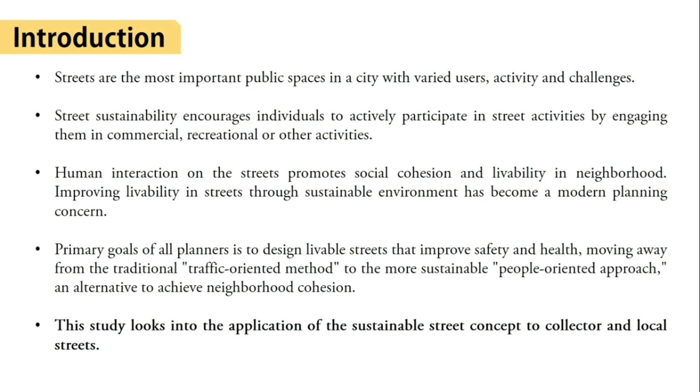This is more towards a sustainable, people-oriented approach. This study looks into the application of sustainable street concepts to collector and local streets. Purpose: the impacts of physical and non-physical variables on collector and local streets will be discussed in this review study.

The physical features in streets are objective, and their impact on sustainability is quantified by characteristics such as street width, sidewalk, tree canopy, and age of the buildings. Non-physical aspects are subjective and are judged by factors like imageability, legibility, safety, and transparency.

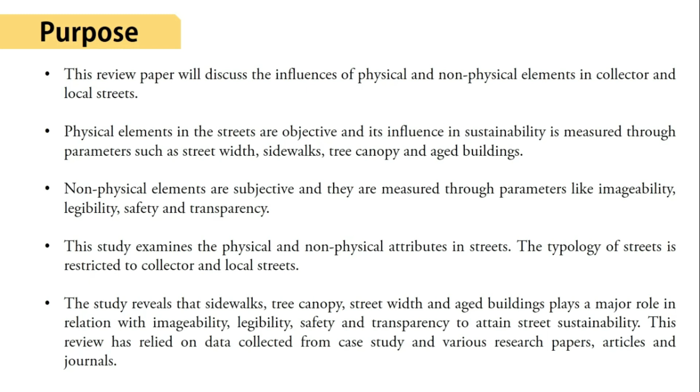This research looks at the physical and non-physical characteristics of the streets. This study reveals that physical attributes play a major role in relation with non-physical attributes to attain street sustainability. This review has relied on data collected from the case study and various research papers, articles, and journals.

Methodology: this study's methodology comprises a case study review supplemented by a literature review. First, a review of the case study was conducted by examining the physical and non-physical aspects of four mixed-use commercial and residential streets in Mylapore with varying traffic levels.

A survey was conducted on chosen streets to evaluate the physical and non-physical qualities. The comments were recorded and assessed for physical and non-physical properties by developing criteria for evaluating the physical conditions of mixed-use collector and local streets, as well as by reviewing prior research that assesses the street's urban design qualities.

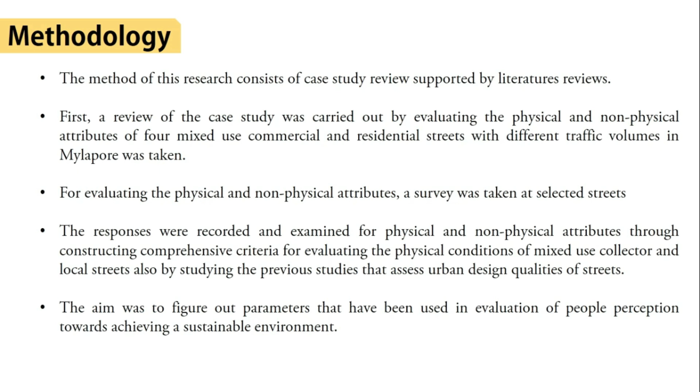The aim was to figure out parameters that have been used in evaluation of people's perception towards achieving a sustainable environment.

Study area: Mylapore is a heritage neighborhood in Chennai, Tamil Nadu, well known for its residential complexes, temples, retail malls, music halls, and auditoriums, as well as classic 19th century residential structures. It is one of Chennai's most densely populated areas and a favorite destination for academic interest in urban planning and development.

Despite a number of challenges such as excessive traffic and street congestion, it performs important religious and economic functions. Though it has issues such as high traffic and overcrowding in the streets, it serves as a religious and commercial center.

One of the most significant urban design difficulties has been the lack of separation between pedestrians and the public domain. In order to acquire a better understanding of the influence of physical and non-physical properties, this review study uses descriptive analysis to track the key characteristics of mixed-use streets.

A questionnaire was the primary data gathering strategy used in this study. The map shows the study area; four streets around the temple premises have been selected, and sample street perspective images are shown here for understanding.

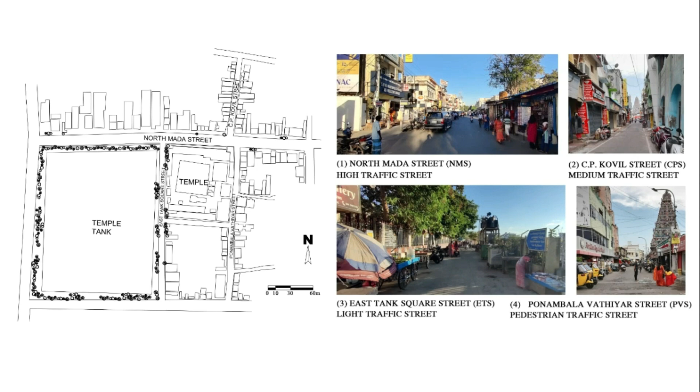Street selection criteria: a high density mixed-use collector street and three local streets bisecting this collector street, with medium, light, and pedestrian traffic flow, were chosen for the study.

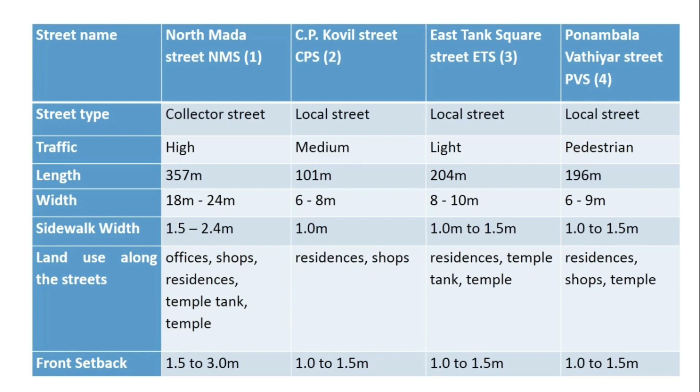The table shows the type of streets, traffic, length, width, and available width of sidewalks and land use along the streets. This study examines a variety of physical and non-physical aspects to investigate the

attributes and characteristics required for a successful livable street. As a result, in this table, the primary characteristics that address the concepts of livability in mixed-use streets are classified as physical parameters.

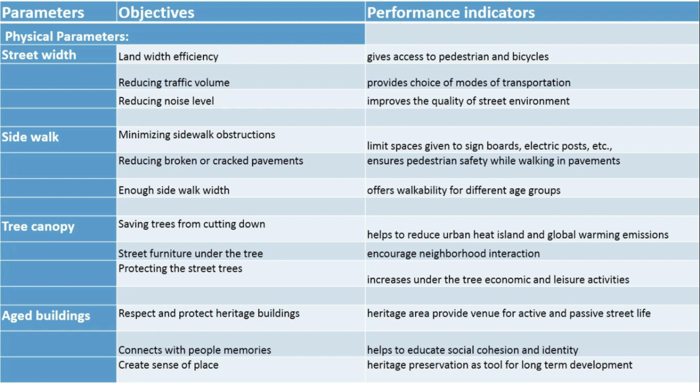Each parameter is listed with its objectives and performance indicators. Further, each parameter is framed with three sets of questions, and the observation and evaluation are done for both collector and local streets, and the results were analyzed.

Based on the questionnaire output, the results were tabulated in this table showing the assessment of streets for the physical attributes.

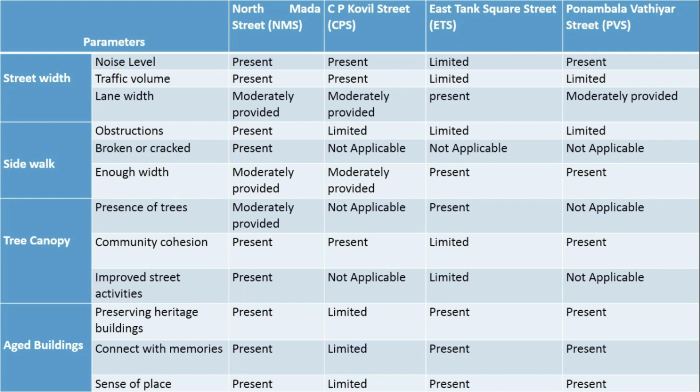Each selected parameter played a major role in street sustainability. Street width encourages walking, bicycling, and other modes of active transportation. Sidewalks are important components of pedestrian-friendly streets because they provide pedestrians with safety, accessibility, comfort, and efficient mobility.

Tree canopy: trees can reduce stress and promote outdoor activities. Trees integrated in a well-designed streetscape attract more people to go for walking and children to play around.

Aged buildings: active and passive street life are more common in heritage areas. It also educates social and cultural values, gives identity, and brings social cohesion for sustainable development.

The characteristics of urban design qualities are referred to as non-physical parameters in this study. The four major parameters considered are imageability, legibility, safety, and transparency.

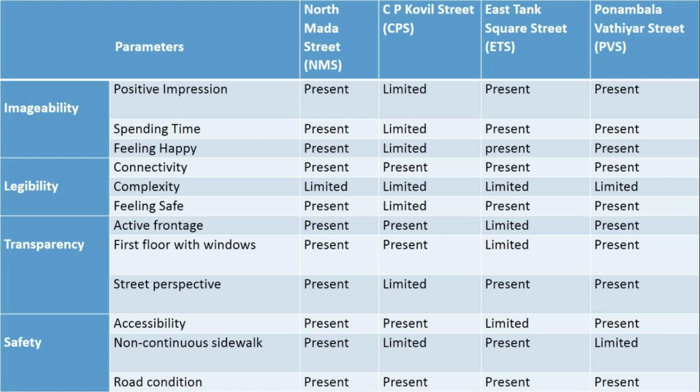Though these parameters are subjective and largely depend on individual perception, for the purpose of this study, through a set of questionnaires, all four selected streets were examined for these parameters, and the results were tabulated in a table showing the assessment of non-physical attributes and their influence on street sustainability.

Further, each selected non-physical parameter influences street sustainability. Imageability: the sense of community is perceived through public spaces, buildings, people's participation, social inclusion, and supporting community services. The shared experiences of people and the history of the place over the years emerge as the imageability of the place.

About legibility: effective connectivity between streets encourages walkability, wayfinding, and spatial connections in an urban neighborhood. Legibility promotes street activities and helps people understand the neighborhood more effectively.

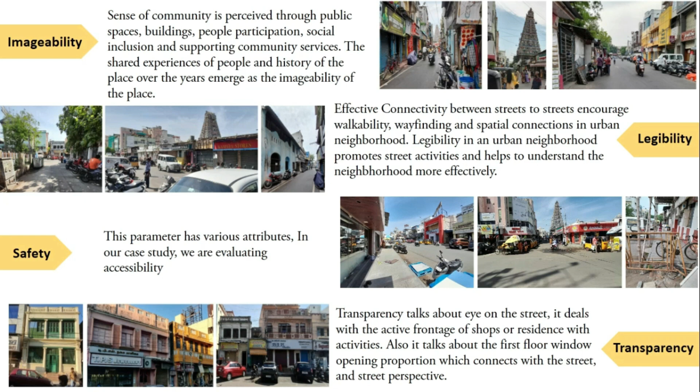Safety: this parameter has various attributes; in our case study, we are evaluating accessibility. About transparency: it talks about eyes on the street, dealing with the active frontage of shops or residences with activities, as well as the first-floor window opening proportion which connects with the streets and street perspectives.

Conclusion. According to the Congress for New Urbanism (CNU), streets should be organized, barrier-free, and accessible to everyone regardless of age, gender, or socioeconomic status.

Pedestrian-oriented development can only happen if there is enough street width for all modes of transportation, including a designated pedestrian lane that encourages people to walk and spend time on the streets. Lane separation also ensures street activity.

People can walk, sit, stand, and relax with their friends and families on a sidewalk with enough width, street furniture, and proper lighting for safety.

Street trees help reduce the urban heat island effect, and also provide economic and leisure opportunities under the tree as neighborhood activities. There are a lot of activities happening under the tree.

The policy has to be reframed to protect street trees and enable nature-friendly development plans.

Aged buildings always connect with memories. Reframing the development policy and development rights helps conserve heritage buildings.

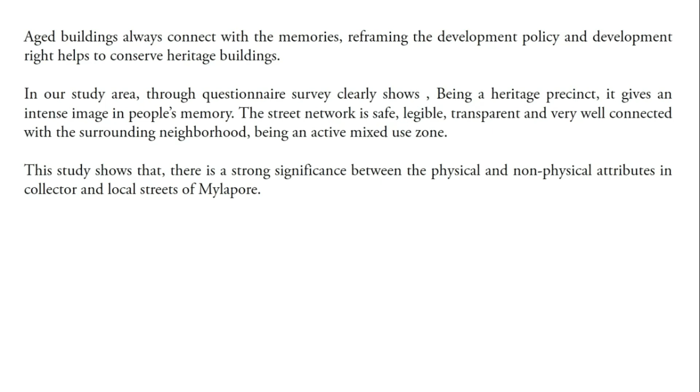In our study area, through the questionnaire survey, it clearly shows that being a heritage precinct gives an intense image in people's memory. The street network is safe, legible, transparent, and very well connected with the surrounding neighborhood, being an active mixed-use zone. This study shows there is a strong significance between the physical and non-physical attributes in the collector and local streets of Mylapore.